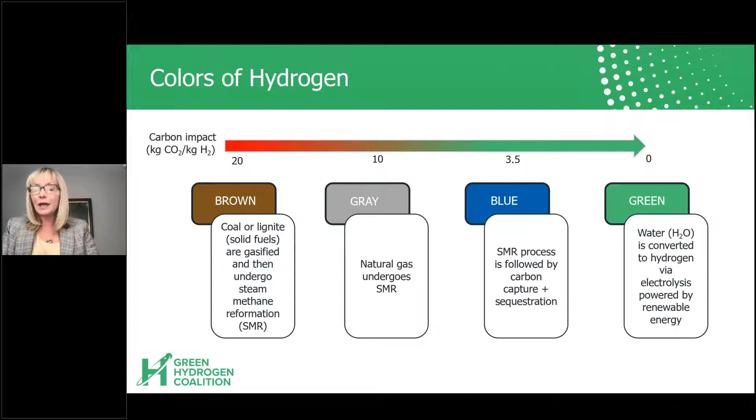So as the next slide shows, I mentioned already that hydrogen is a globally traded commodity today. It's used in a multitude of sectors across the globe. If you're looking at refining or ammonia production, even transport, even though that's small, it's still used in transportation. And so what if we could take all of this hydrogen that's produced across these different value chains today, effectively 100 million tons of hydrogen traded globally, and I think growing, but most of that's made from fossil fuels. And if you compare that carbon intensity to a country, it's roughly the size of Germany.

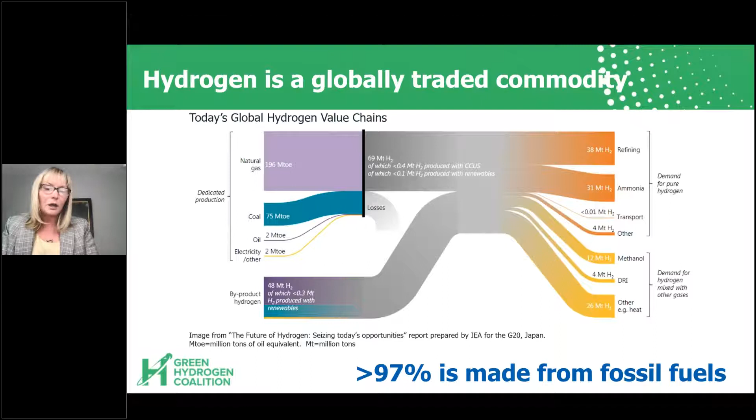And so we really could significantly reduce the intensity across multiple value chains and uses today of a commodity that is already globally traded by utilizing green hydrogen and managing the carbon intensity of those outputs. So what is green hydrogen? Green hydrogen, as I mentioned, is hydrogen that's produced using renewable resources. So one process takes solar and wind or hydro, and that can come from the grid, resources that are already built, or it can be purpose-built.

You then take that purpose-built wind, solar, or renewable energy from the grid, you put it into an electrolyzer, which takes water and separates it into its respective components, hydrogen and oxygen, and the hydrogen is in fact a green hydrogen product. Similarly, we also support biomass and biomethane as renewable resources that can go into the production of green hydrogen.

So similarly, you can do a biological reforming of biogas or a thermochemical application to reform and gasify to produce a green hydrogen. And at the Green Hydrogen Coalition, one of our principles is really to be technology agnostic. So we are technology agnostic when it comes to the production of green hydrogen. We support all methods of producing green hydrogen.

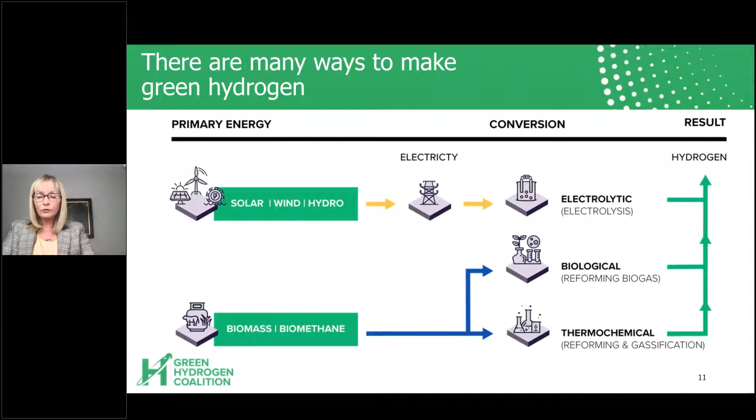So what is so special about green hydrogen? Well, our thesis is that green hydrogen is a super game changer in meeting our climate goals. And in fact, it's a fundamental building block. And that if we utilize green hydrogen, we can accelerate decarbonization of multi-sectors. So accelerated adoption is fundamental. And it's not a commercial issue, it really is a market design challenge.

So we really need to address the market issues if we're going to scale green hydrogen today, take advantage of those commercial pathways which exist to safely produce green hydrogen, provide for a multi-day and seasonal energy storage system for our power grid, and also scale hydrogen production to enable decarbonization across those many difficult to decarbonize sectors as well, like shipping and aviation. So green hydrogen really has versatile applications.

You saw it in the slide with regard to how we use hydrogen today. You can use it in transport, you can use it in power. It has industrial applications, chemical applications, and also agriculture. So again, it is a tool and it is a resource that can decarbonize many sectors. Now, one of the questions I often get is about costs. Well, green hydrogen today is more expensive than some of the other options.

So moving to the next slide, what does this mean for the future? Well, we fully anticipate as we deploy green hydrogen that the cost of green hydrogen is going to continue to decline. Just by way of example, electrolyzers, as more of those are in production, the cost of those electrolyzers will go down, making production of green hydrogen less expensive. But also what is simultaneously happening is that inputs to the production of green hydrogen, like solar and wind, are also rapidly declining, and really at a rate faster than folks had originally anticipated.

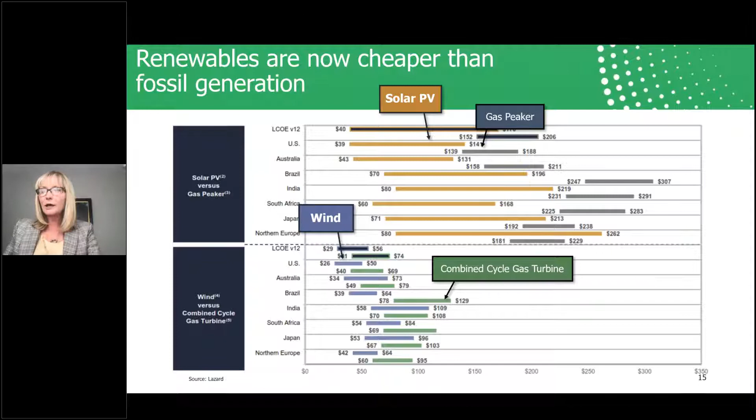And as I mentioned, this low cost is going to be important for driving that multi-sector decarbonization across our energy space, whether we're looking at electricity, heat systems, thermal systems, transport, or feedstocks for all of those other applications that I mentioned. So green hydrogen costs are going to come down, and we're going to see it increasingly deployed across these many sectors. And I'll talk about a few of those today.

So maybe just talking about transportation, folks often ask, well, how do you move hydrogen? Well, hydrogen today is in fact transported in tanks and canisters or on trucks. Next slide please. You can also put hydrogen into pipelines and in fact take advantage of natural gas pipelines that are already in place to move green hydrogen, and that can be a low cost opportunity today. You can also store it in other chemical forms like in ammonia.

And to the extent that you take green hydrogen and you put it into a power generation system, for example, utilize it in a combined cycle combustion turbine, you can use existing transmission and distribution lines in that power to gas to power solution to move those molecules via our transmission and distribution systems.

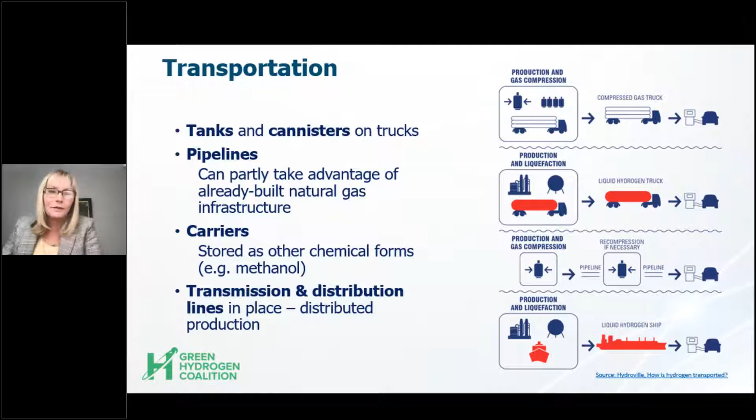So not only can green hydrogen contribute to cleaning up and decarbonizing our transportation system, we have a variety of transportation solutions across the board for moving green hydrogen. So on to the next, I think, big element of green hydrogen, that is the fact that green hydrogen can, in fact, as you've just seen from this transportation slide, repurpose existing infrastructure.

And I know Greg Wynn, who's on our webinar today, is going to talk more about this. But the reason this coal plant is so exciting is because this coal plant is going to be decommissioned and recommissioned as a combined cycle combustion turbine, a little less than half the size it is today in terms of its nameplate capacity, 1,800 megawatts to about 840 megawatts. But that combined cycle combustion turbine is going to use green hydrogen on day one of operations, which is slated for 2025. So repurposing existing infrastructure is critical.

And this is an economic engine for this community, providing a variety of jobs. So what we see with this plant is not only the repurposing of existing infrastructure, but repurposing of a multitude of resources, including jobs, so providing an environmental and economic solution all in one.

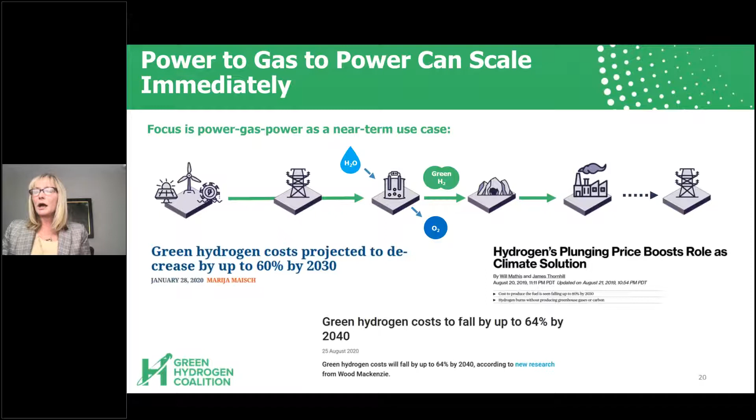So just moving to the next slide, I also get asked, well, it seems like we're seeing a lot of storage get developed. What makes green hydrogen so special in terms of a storage solution? And so I want to talk just a little bit about that for a minute. We at the Green Hydrogen Coalition do support all types of energy storage. And we recognize that different types of energy storage have different applications.

competitive solution. But the thing is, with green hydrogen, you can provide not just that intraday solution within the day, but also across multiple days, weeks, and even seasons. And as I mentioned earlier, we're going to be seeing more renewable resources brought on because they are showing up as the cost competitive option today.

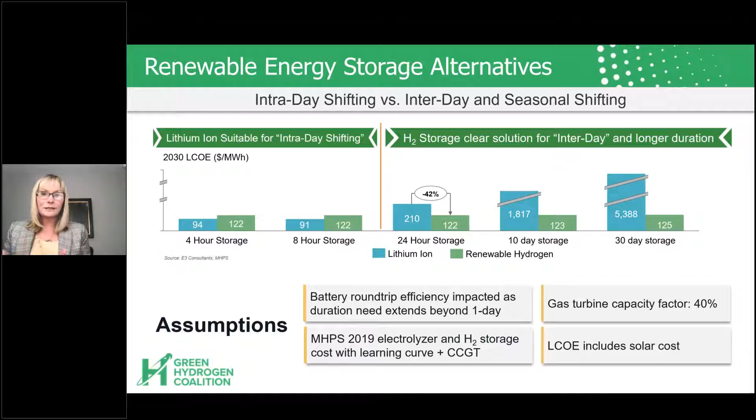And with those renewable resources, we're going to have some grid balancing requirements. And green hydrogen absolutely can provide that grid balancing service across weeks and seasons that are going to be required. So because this question gets asked, I wanted to share that with you, that really it's about all storage, but really there are unique applications for different storage opportunities.

So I do want to share with you some of the things that are happening globally, because we're not talking about a future that doesn't exist yet. This is happening today, boots on the ground, so to speak, with production and utilization of green hydrogen and big projects like the Intermountain Power Project coming online. And there are a lot of drivers for green hydrogen.

So as we look at kind of a roadmap for clean energy, it's across all sectors. We've seen within different countries, within the European Union and the European Union Commission, really identifying large targets for decarbonization and clean energy across multiple sectors. And as we've mentioned, a number of those sectors are going to be difficult to decarbonize. And that's why green hydrogen really shows up as a game changer for decarbonizing many, many sectors.

So let's just maybe talk about Australia for a minute. Australia has been in the news a lot in terms of their hydrogen economy and how they're looking at green hydrogen specifically as a significant export opportunity. And again, this kind of goes back to planning. We see the cost declining, we see these multitudes of applications. Let's plan for it. Australia actually developed a national hydrogen roadmap, creating hydrogen as part of Australia's future and identifying the specific opportunity for hydrogen exports as an economic engine for the country.

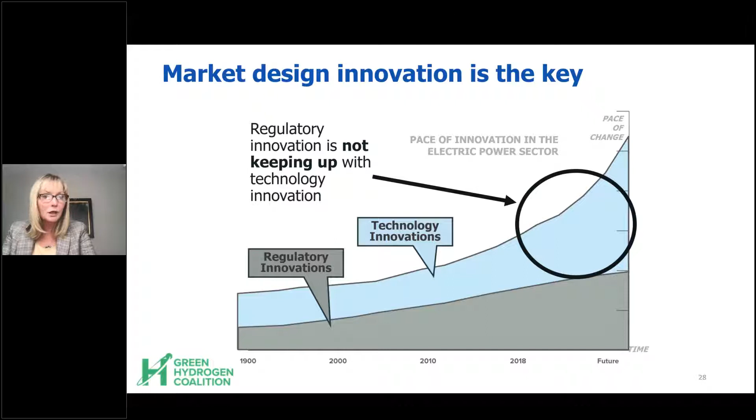So we do have a set of policy recommendations at the Green Hydrogen Coalition for identifying opportunities to develop and deploy green hydrogen. We think that you have to define green hydrogen broadly, as we do. We also recognize that states have certain integrated resource planning processes, and that in fact green hydrogen can help to meet those state goals around those integrated resource planning policies, as well as assuring resource adequacy or capacity needs associated with those planning processes. And also, very relevant for this conversation today, can help in terms of the planning for our future gas system. And so that planning, we think, is really critical, and there is a role for green hydrogen to play in that.

Now, today we have RECs in place where we can track values for renewable resources. We don't have something similar for green hydrogen. So as a tool, evaluating and tracking green hydrogen can be an important market driver. We also want to look at how we can enable wholesale markets to allow for green hydrogen participation, very similar to what we've seen evolve with other types of storage technologies. Continued research, development, and demonstration are also really fundamental, and providing regulatory pathways to allow and support those innovations to be tested, I think, is going to be really critical going forward.

So I think we all want to leave our planet better than we found it, and create an affordable, reliable energy future across our energy systems that are so vital to the way that we live life, whether we're looking at the natural gas systems, transportation, or the power sector. And so let's look across all of those sectors, identify what are our goals in terms of decarbonization for those various sectors, then how can we create a hydrogen roadmap that will help us get there.

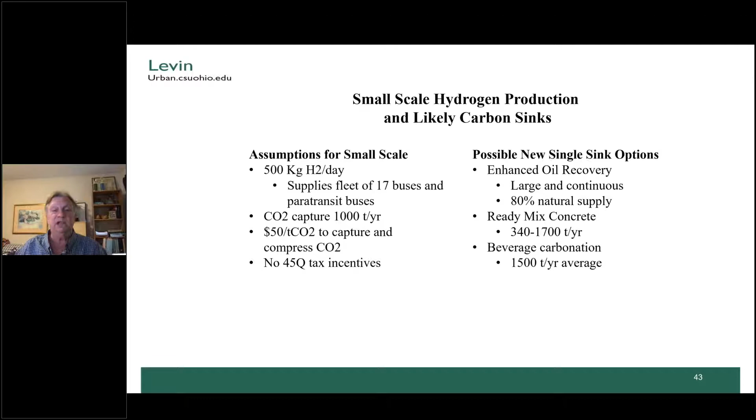So these are numbers from our enhanced oil recovery strategy. And we looked at 3 fields. The 2 that are in Ohio currently are not active. Core Energy is active, but you can see it's 450 miles away. That's the next closest oil field, near Traverse City, Michigan. But the East Canton oil field is very close to SARTA. It's only about 20 miles away. And this was a very promising opportunity for carbon capture and sequestration.

And so we looked at the capture cost as being around $50, trucking at around $6 per ton, and then the injection being about $11 more. So the total cost was around $67 per metric ton of carbon dioxide. So that's really the target number that we need to get to. That's the amount of money we would need to recover from this in order to break even on it. There's a Morrow field, which is in central Ohio, also another possibility. But the East Canton field is the most attractive in terms of ability to capture and sequester carbon. Next slide, please.

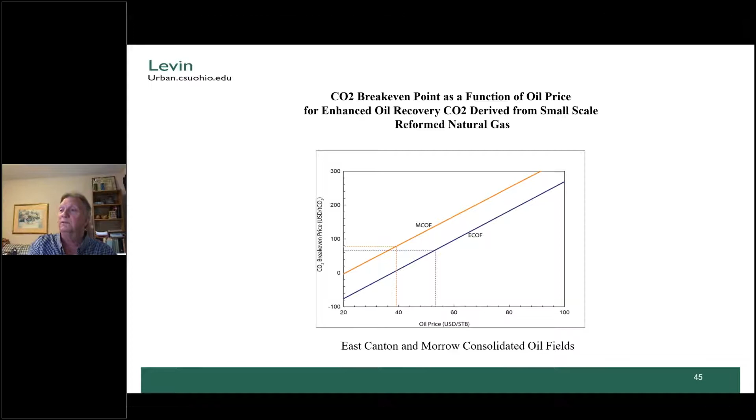With prices of oil where they are right now, there's no plans that I can see in place to reactivate it, but I'm sure that the owners of the field, which I think is Enervest, would be interested in reactivating it if there was a strategy where they could get the carbon dioxide at a reasonable price and inject it into the ground to drive the oil out. But a lot will depend on the price of oil going forward. So next slide, please.

And I can't really define for you the chemistry of this, and for that I refer you to our lead author in this study, Peter Basaris, who is a PhD chemist currently at Cuyahoga Community College, but he just accepted a faculty position at University of Pennsylvania. But he'll still be working with our research center, and he'll be available to answer any questions you may have about the chemistry of ready mixed concrete and these other issues. But I'll try the best I can if anybody has questions today.

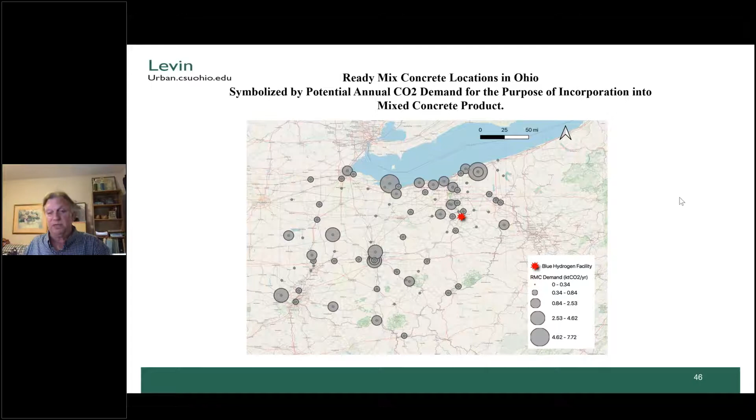So this is just an example of a phased-in approach for how deployment of these refueling stations could be co-located with ready mix concrete locations. Phase 1 is just a single 500 kilogram per day facility in Canton. Phase 2 being three 500 kilogram per day systems, and then refueling stations, and phase 3 more than that.

The idea would be that you'd want to locate them near transportation hubs and where there's a heavy amount of traffic from long haul trucking. But as it turns out, there's another important cost consideration for where you would locate these refueling stations, and that is if you could get close to a high pressure natural gas line, that will also significantly reduce your costs as well, because one of the things we have to do at SARTA is to actually provide compression when we bring the natural gas into the steam methane reforming plant.

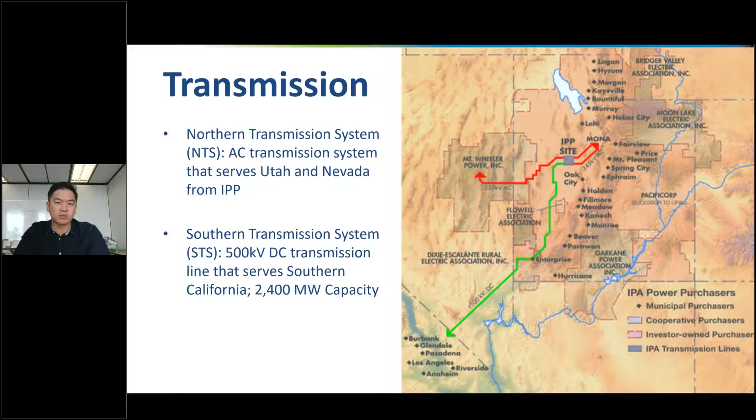Next slide, please. And like I mentioned earlier, this is not an LA project specifically. LA is a very large participant, probably the biggest share of the power purchasers, but the project itself is a large collection of different participants. This idea of regional cooperation between Utah and California has been a big part of our history and will continue to be part of our future when we look at how to transition this, at one point state-of-the-art, coal facility into a state-of-the-art hydrogen powered plant.

So unfortunately, we're not going to be carrying on with all of the participants. There are some that are leaving the project, but LA will still continue to be a large portion of it. Looking at the new project itself, we call it the IPP Renewed project. This is us taking the coal facility and changing it into a natural gas facility, because there is such an emphasis for us to be reliable as a system, as a project. So we're really looking for that dispatchable energy to maintain reliability and to also support the HVDC system.

These units are going to be capable of integrating the renewable resource variability. When you look at the system as a whole, there's going to be a lot of variability because of the renewable energies, and so this power plant will help us smooth out the system by producing that dispatchable energy. It's going to be required for us to get to that 100% renewable goal, and that's the large part of my presentation today. And because it is located in Utah, it will have less reliance on the in-basin gas units that we have, and also some of the storage problems that we saw at the Aliso Canyon storage facility.

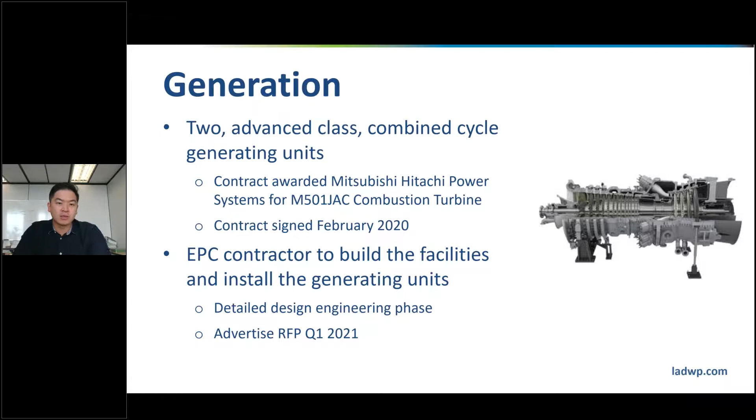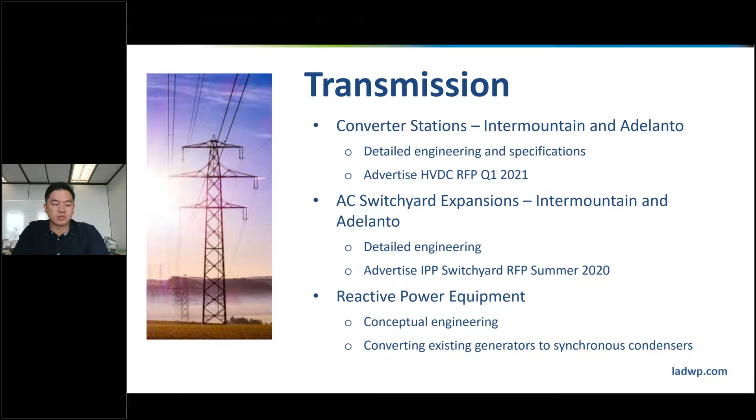So with that introduction, I really want to talk about now how it is that we can take what we have at the Intermountain Power Project and use those existing resources to move forward with this green hydrogen potential here. I talked a little bit about the transmission system that we do have, the great amount of renewables that are in the area. The Intermountain Power Project currently sits on 4,600 acres of land, and we have water rights that are needed. We obtained water rights at the beginning of the project for the coal units, and as we move over to the gas units, there's going to be significantly less water usage, but we still will maintain those rights. And so, to the question earlier about water, we have the rights to that water, and production of hydrogen isn't as water intensive as some may think.

And so, because we have the abundance of water because of the coal plants, and the reduced use that we are looking at for the new project, we'll have sufficient amounts of water to move forward with the green hydrogen production. As mentioned earlier by Dr. Nelson, we are sitting on top of a large salt formation that is ideal for storage of hydrogen. And of course, we can't forget that we have a large workforce out in the Utah area, specifically at the Intermountain Power Project. We have very technical staff, experienced operators, and great management there, that we can also utilize to drive the economy and keep people employed in that area as we look at this new industry.

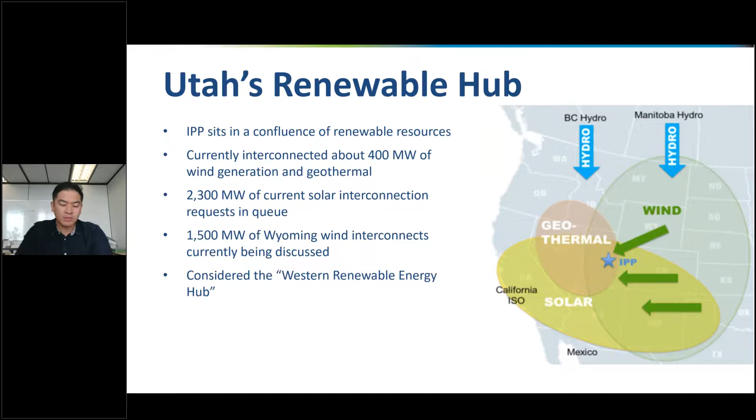So when we look at the whole chain of how we're going to get from renewable energies all the way to the production and combustion of hydrogen, we see that we have a great opportunity in this area so that we can utilize the resources that we do have and those capabilities so that we can both create this carbon-free energy and then also try to solve the problem of long-duration energy storage.

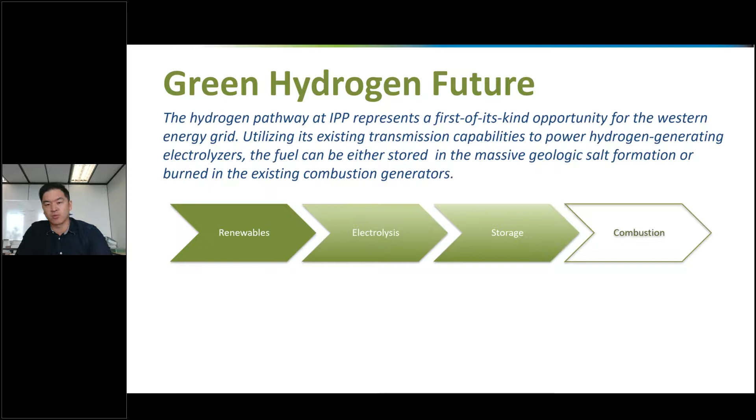And so we go from renewables that normally would have been curtailed to power electrolysis, and then into storage for the long term, and then to be used for combustion in the future. So looking at what we can do for generation, as I had mentioned when we were talking about the Mitsubishi generators, they will be capable of burning hydrogen day one. And so as part of the RFP, when we put it out, one of the requirements was to demonstrate the capability of burning hydrogen through that new turbine.

And so when we look at the generators, next slide please. When we look at the generators, what we're trying to do here is really understand what the capabilities are from the different manufacturers. And so part of the RFP was for them to demonstrate that, and not only demonstrate a certain amount, but to also look at what the glide path would be to get to that 100%, what it is we can do now in current investment, so that when we go to higher and higher volumes of hydrogen, we're not tearing down infrastructure to put up new.

And so as part of the studies that we were conducting, and as we looked at the project and its future, we are now looking at the ability to put in existing infrastructure that would allow us to have higher and higher burns of hydrogen without having a major impact on the plant itself.

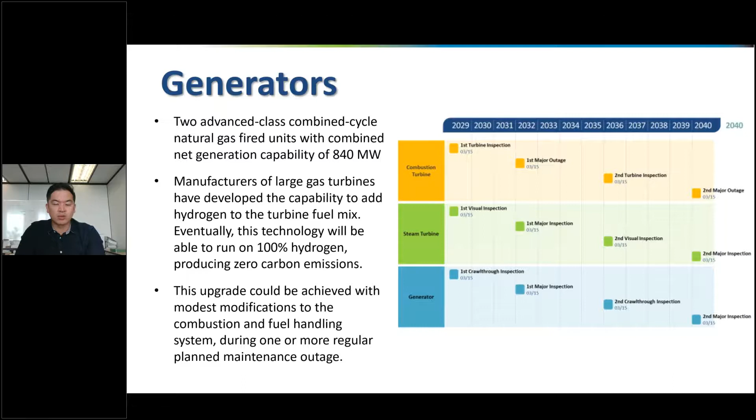So when we look now, just going beyond the generation, because that's one part of the value of the Intermountain Power Project, to the reduction of greenhouse gases that are coming out, one of the big important parts of this hydrogen venture that we're looking at is going to be storage. And so one of the most unique features of the project is going to be the storage component. When we look at the potential that we have with these salt caverns, it allows us to do something very unique in that we can now shift seasons.

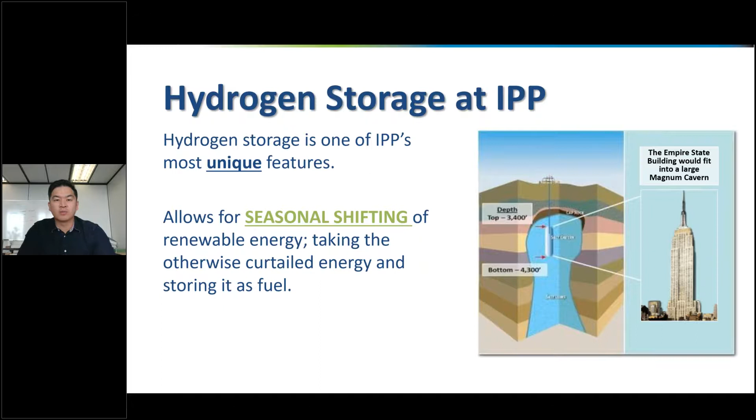One cavern would hold about 5,500 tons of hydrogen, which is equivalent to 200,000 hydrogen buses, 1 million fuel cell cars, 14,000 tube trailers that would typically be used for delivery. So what you're doing here is taking a lot of potential and putting it into the ground and eliminating the need for transportation of hydrogen. And the potential that we do have in that area is we have probably over 100 caverns that can be built into that salt dome at IPP.

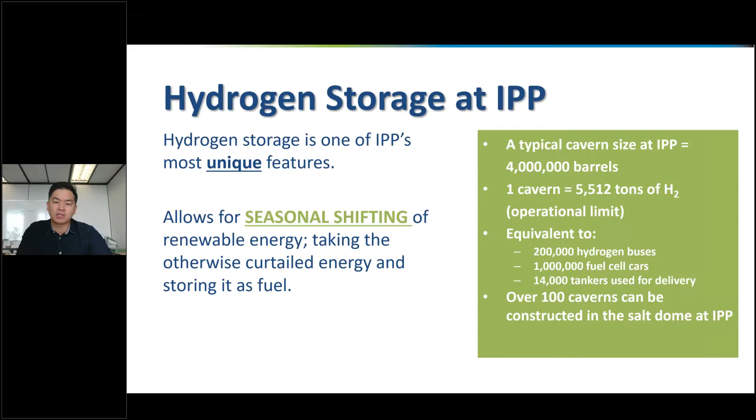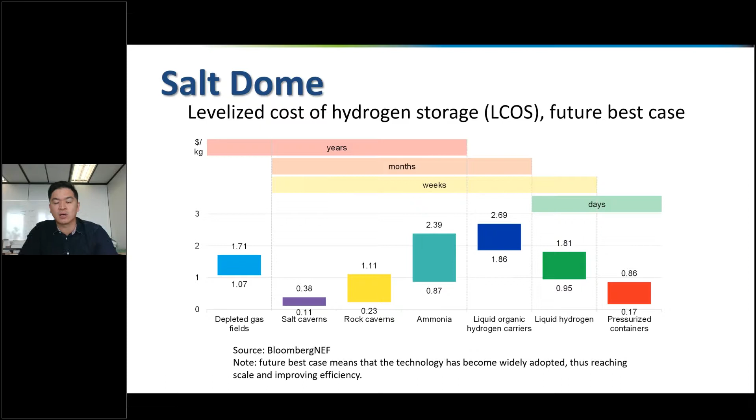There are other options, of course, like the pressurized containers, which could potentially be an option for us as well because we do have so much land. But the salt caverns, since we have the opportunity to do that, it is something that we are very interested in looking at. And so going back to the need, it's not a problem that we're going to see in terms of overgeneration in the next 5-10 years.

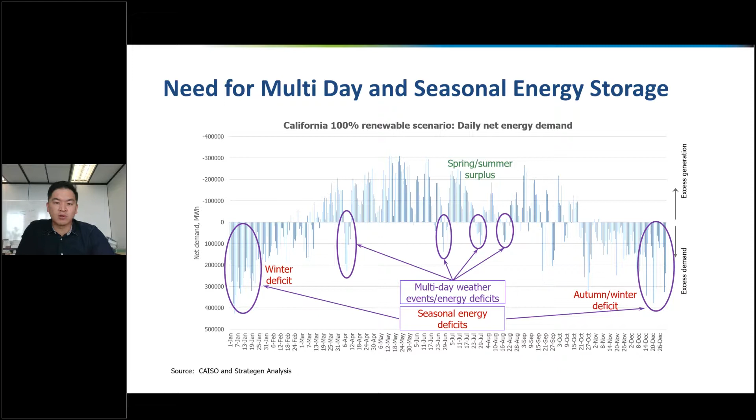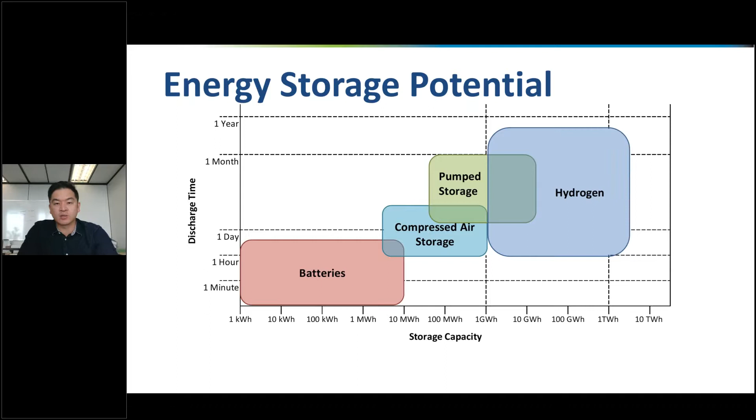And just as a reference, the storage in one cavern is equivalent to about 84 times one of the new energy storage projects that LA has been looking at, which is a 1,200 megawatt hour battery system. So one cavern at IPP is about 84 times the storage capability of that one project. So next slide, please.

So looking at now just the overall picture, just to kind of recap what we're looking at. We have renewables, we have the wind, solar resources from Wyoming, Utah, Nevada, California, and the transmission to move that energy into the electrolysis process to create that green hydrogen, taking that renewable energy, putting it into these electrolyzers, changing that water into hydrogen gas, taking that gas, storing it in the underground salt caverns or potentially different storage media on site, and now allowing for the seasonal shifting of renewable energy. And then when the time is up, have the potential to now run the combustion turbines with a mix of natural gas with the vision of going to 100% by 2045.

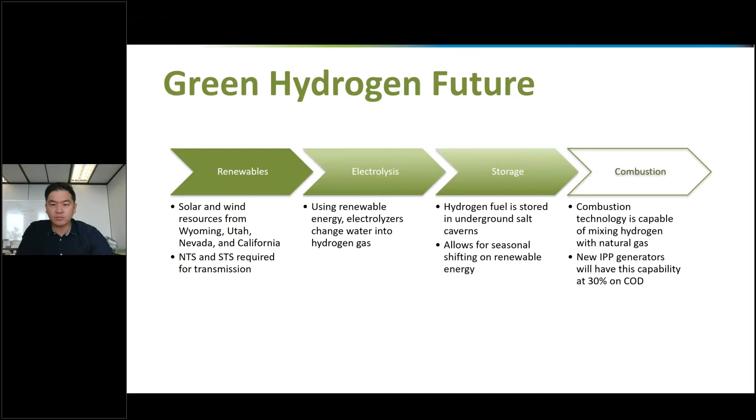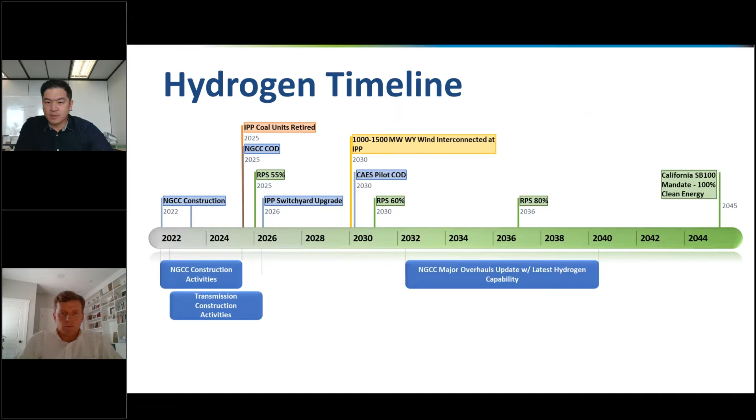And so, that really concludes what I have to talk about today. Again, we are looking at something incredibly exciting here, some great opportunities to use the resources that we have and get to that clean energy future that we're all looking for.